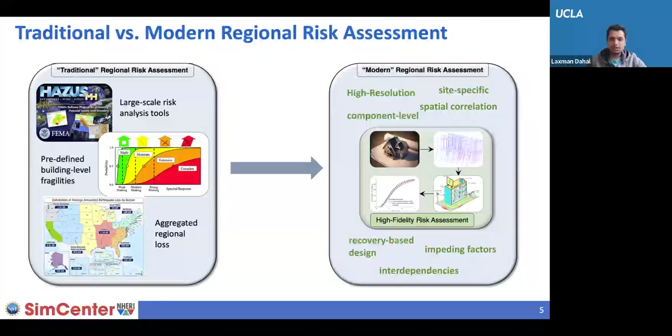So what is a high fidelity, high resolution risk assessment framework? Before getting to that, I want to first establish the definition of some terms that I've been using and will be using for the rest of the presentation. So by resolution, I'm referring to the level of detail and accuracy in a map. So from the regional assessment framework perspective, the highest resolution that you can have is site-specific analysis. So that's per building across a region, and you could aggregate across neighborhood and zip code. And as you zoom out further, you lose the level of resolution.

And by fidelity, I'm referring to the level of detail in structural modeling. So in this case, I'm loosely referring to the dimensions as the level of fidelity, but obviously it would include the detail of the material parameters that goes into the numerical model as well. So fidelity refers to the detail in the structural numerical model, roughly.

And the other term that I'll be using is FMA. So that refers to fully mechanistic assessment. So that assessment follows the FEMA P-58 methodology. So it goes through hazard simulation, creates a structural model, and performs everything explicitly, defining even the components per building and per floor level. So yeah, those three terms are the terms to keep in mind.

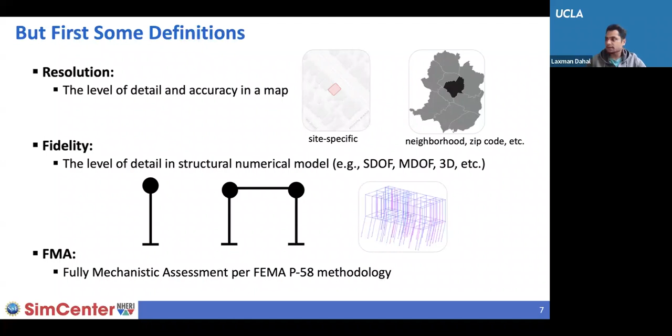So the proposed framework has six different steps. So the first and trivial step is to identify the region and building inventory, right? So once you have the building inventory and the region, then we would want to model the exposure and model the seismic hazard. So these two steps do not necessarily need to be in sequence, since these two steps are independent, so they can be performed in any order, as long as you model the exposure, right?

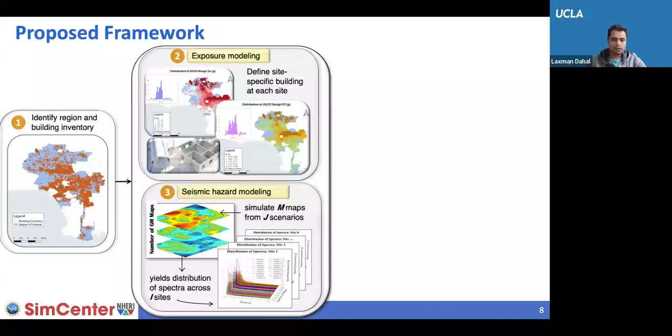So you model what buildings you have at each site, and you model what is the anticipated shaking intensity that you're expected to see at that particular site. So once you have the building and exposure modeled, then we apply some kind of filter. And the goal of this filter is to identify similarities between sites, right?

So for instance, across a region, there could be two sites that have a similar building and that are expected to see similar shaking intensity. So instead of performing explicit FEMA P-58 type of analysis for two different instances, we would only perform analysis for one and use the information from that to represent the losses at the other one. So that way we reduce the number of explicit analyses that we perform while still maintaining the high level of fidelity and resolution.

And so once we identify the number of unique runs that we have to perform across a region, right, then we implement Auto-WoodSDA, which is an end-to-end automation tool that I'll talk about in the next slide, and use that along with distributed computing to scale that computation for thousands of buildings, right? And the output of that process would be the site-specific distribution of losses across however many sites that you have within the region.

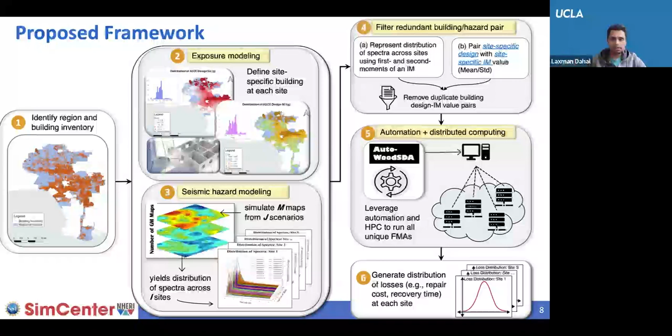So this is the overview of the end-to-end automation tool, Auto-WoodSDA, or WoodSDA in short. So one end of the computation is inputs, right? The set of user inputs, which includes site-specific information such as latitudes and longitudes, building-specific information such as footprints, the material type, layout of the shear wall, as well as the ground motion sets that you would use to run the dynamic analysis.

And the other end of the workflow is the output, which can be any loss parameter that you would want. For instance, collapse fragility, the loss curve, distribution of functional recovery time, and so forth. So there are 4 steps in the end-to-end workflow.

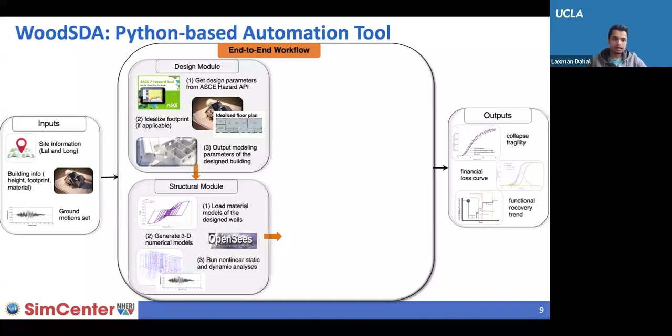The first one is to take the building information and site-specific information and create a code-compliant design. And using that design, we create a 3D OpenSees model. We import the ground motion sets and run the dynamic analysis, perform building level damage assessments, and then use the automation tool to populate the components into the building, and use Pelicun to perform economic assessment, and also the ATC 138 functional recovery methodology to perform the functional recovery analysis.

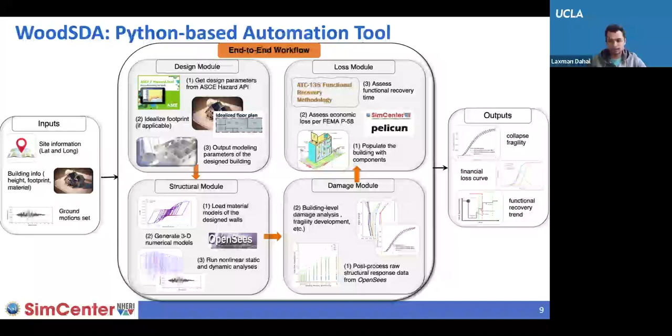So you might have noticed that the four modules follow the FEMA P-58 methodology as shown on this slide, right? So for instance, the structural analysis closely mimics the structural module that I presented on the previous slide.

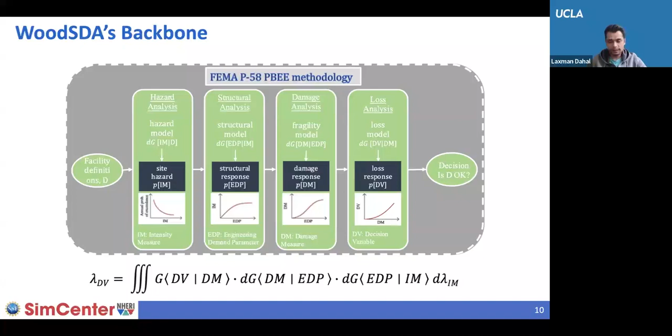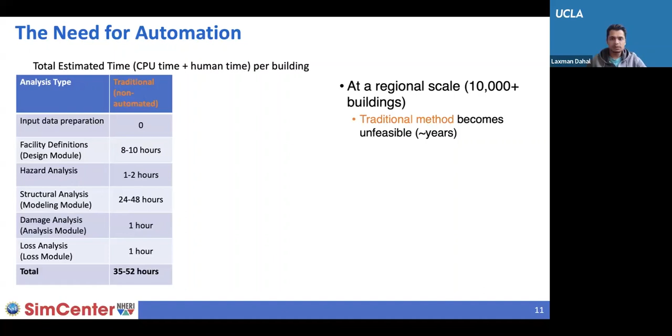And if we wanted to scale that for a region with tens of thousands of buildings, that method would be unfeasible, right? So we basically wouldn't be able to perform regional scale assessment. With WoodSDA as a standalone tool, we would reduce the computational time significantly, but not enough to make the computation feasible without supercomputers, right? And one of the most time-consuming parts of WoodSDA as of this point is input data preparation.

So, since we design code compliant design within WoodSDA, it requires explicit configurations of shear walls to be defined so that it can design those shear walls, and that takes about 3 to 6 hours. But in this study, what we did is we predefined a database of design variants that I'll talk about in the next slide, so that we don't have to spend that time preparing the data.

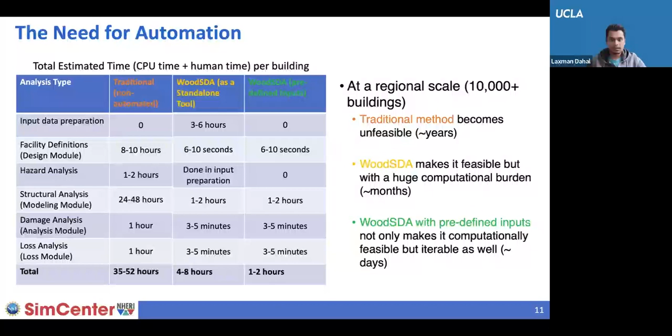And with the predefined database, the WoodSDA is not only computationally feasible, but also iterable if we wanted to do sensitivity studies for recovery-based design. So I won't go into detail on what went into the development of this design variant database, but we created a database of archetype buildings, but these buildings only have the shear wall locations and length defined, but they have not been designed yet, right?

So we included 4 different parameters: number of stories, different floor layouts, seismic weight, and all of these layouts have been well studied in the published research, such as the FEMA P-2139 study, which was the product of the ATC 116 project.

Right, so once we have the automation tool figured out, then we move on to the distributed computing. We use HPC cluster in 2 major ways. The first one is to implement the WoodSDA in a distributed computing setting. Each computation of WoodSDA for one particular building is independent of one another. So even though the assets are distributed spatially, the computation itself is independent. So there is no input or output data flow between different processes, which allows us to exploit the distributed computing framework and not be constrained by any computation limitations.

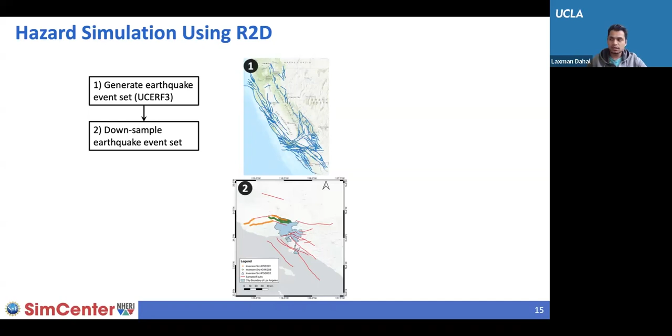So using that, we downsample the earthquakes into a manageable set. In this case, we downsampled 300,000 to about 20 scenarios using the OPS method, which I'll briefly touch upon in the next slide. And then for each scenario, we simulate correlated ground motion maps. And then we downsample the total ground motion maps to, again, a manageable size. And all of these processes are done using R2D backend code.

And finally, the fifth step is to select the ground motion records, since we're using Auto WoodSDA to perform explicit analysis per site. So we need to select ground motions per site. And even though R2D has a built-in ground motion selection tool, we developed our own in-house to incorporate some of the previous research that we have done on this topic.

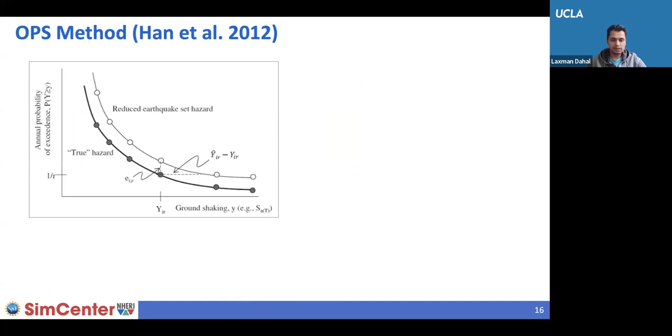So to give a brief overview of the OPS method: the objective of the OPS method is to match the true hazard, that's the hazard that we get from the USGS hazard API, with the hazard that we recreated from the downsampled set of earthquake events. To do that, it has 5 steps, and it utilizes a mixed integer optimization routine, where it loops over all the sites and all the return periods that you specify, and minimizes the error as it downsamples the population set to the reduced set of earthquake events.

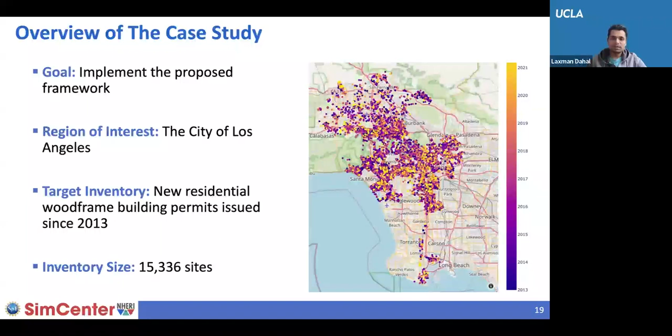So we implemented the high fidelity, high resolution framework for our case study, looking into about 15,300 new single and multifamily residential buildings. These buildings were permitted to be built since 2013, and that data is publicly available in the LA Open database. The figure on the right shows, along with the timestamp, the buildings that were permitted over the years.

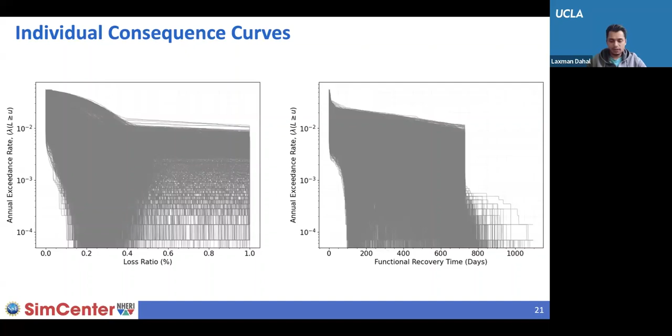I won't dig into the detail of the results, but these 2 plots show the loss curves. The figure on the left shows the loss curve of the loss ratio of 15,000 buildings, and the figure on the right shows the loss curve for the functional recovery time in days for all the 15,000 buildings. One of the things we can do from those loss curves is take a stripe out at a certain return period level.

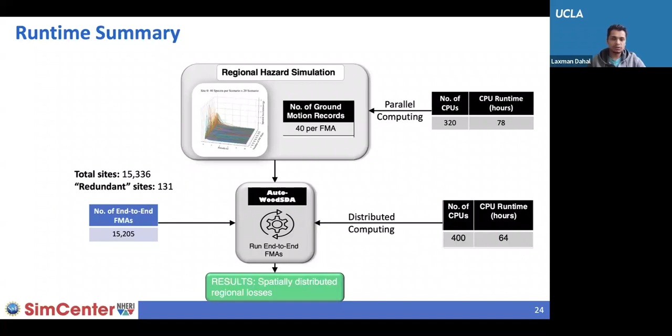As I noted earlier, one of the steps was to identify the redundant sites. We had 15,336 sites, and out of that, 131 are redundant. The reduction seems a little low considering the total sites, but since our goal was to maintain high fidelity and a high level of resolution, the reduction is lower. In the next few slides, I'll talk about how we can play around with different approaches to reduce the number of runs we have to perform.

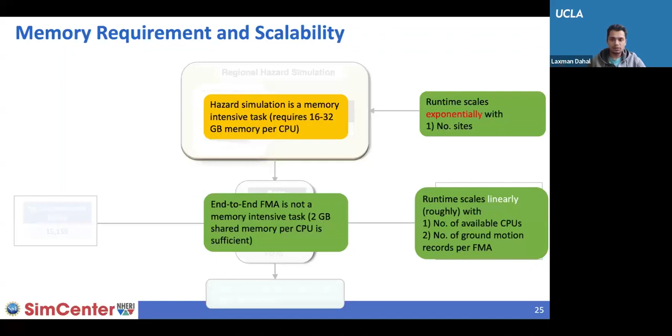In terms of the computational aspects of running these large-scale simulations, hazard simulation is a memory-intensive task. For 15,000 sites, you have a 15,000 by 15,000 matrix, and you have to include the correlations in shaking intensity across the sites. So the computations increase exponentially as you increase the number of sites. That's not the case in the end-to-end fully mechanistic assessment using WoodSDA because the computations are independent. The runtime scales roughly linearly as we increase the number of sites, the number of CPUs, and the number of ground motion records per building.

Running large-scale simulations like this came with many challenges. One of the biggest was the convergence issue in the OPS method. As I mentioned, the OPS method loops over all the sites to minimize the error, and with 15,000 sites, it didn't converge for us. So instead we grouped those 15,000 sites into 108 k-means clusters, and used the centroid locations of those clusters as a representation to reduce the number of maps as well as the number of earthquake scenarios in the OPS-based method.

The other solution we implemented was lifting the runtime cap. Some of the SimCenter tools have a runtime cap built in to limit resources to 60 minutes. So we lifted that and let it run until it converged.

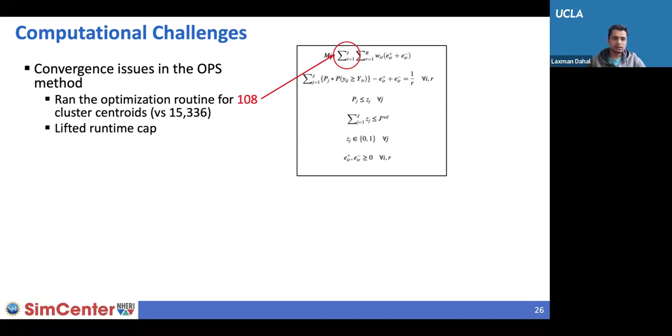Another issue that we faced was the timeout issue in the USGS hazard API, right? So reducing the number of sites to 108 kind of solved that. And we also increased the buffer time on the API so that it doesn't time out while we're running the analysis.

And the third one was probably the biggest one to figure out and solve: the parallel computing input-output bottleneck, right? So R2D uses OpenMPI to parallelize the computations, which is pretty efficient for small scale analysis, but for large scale analysis like 15,000 sites, whenever you put computations into the compute cores, each compute core performs Monte Carlo simulation to generate the map.

So when you transfer those huge data files between the compute node and the root node, the memory allocations within the root node were not able to handle the data that was being transferred back. So we discretized the execution into 4 different batches with 5 scenarios per batch. That's how we were able to run all 20 scenarios and get the stochastic set of maps.

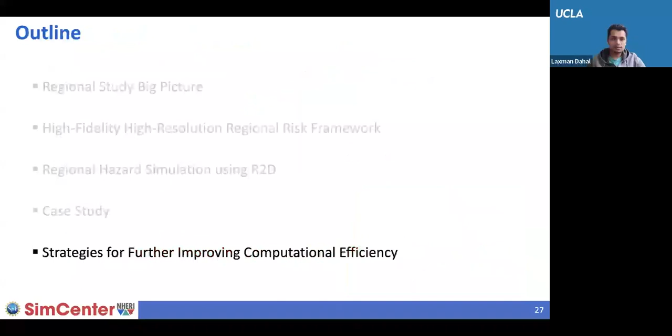So how can we increase the computation, right? We view regional scale assessment as a trade-off between fidelity, resolution, and efficiency. We roughly break it down by resolution and fidelity as I prefaced earlier. For resolution, you can perform a very high level of resolution, so we can define the building at a very high level, and the same for hazard. That would give us the high level of resolution that I presented in this study.

But if you wanted to trade off some of the resolution, for example define the buildings at a bin or a cluster level, you would end up with about 6,600 buildings, right? So that's 1/3 of the total inventory that you started with. If you wanted to reduce the resolution even further to clusters instead of bins, or change the number of clusters, then you'd get about 1,700 fully mechanistic runs that you have to deal with.

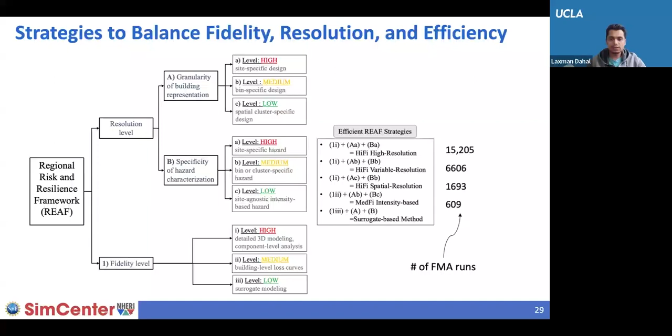So by playing around with different levels of fidelity and resolution, you could control the level of efficiency, and obviously that would be reflected in the robustness of the data that you'll get. But this will indeed give you the efficiency that you're looking for.

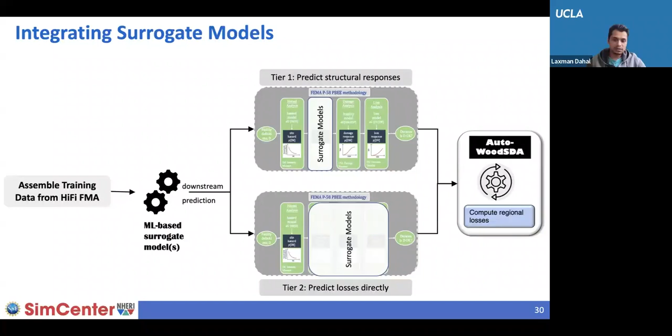Another approach that we're exploring within our research group is leveraging the power of surrogate modeling. We have all of this rich data from high fidelity assessments, so we can use that to develop surrogate-based models, and then use those to replace the computationally expensive part of the FEMA P-58 methodology, which is the structural analysis part, and then perform the downstream loss analysis to get the regional loss. This is another part of the work currently underway in our research group.

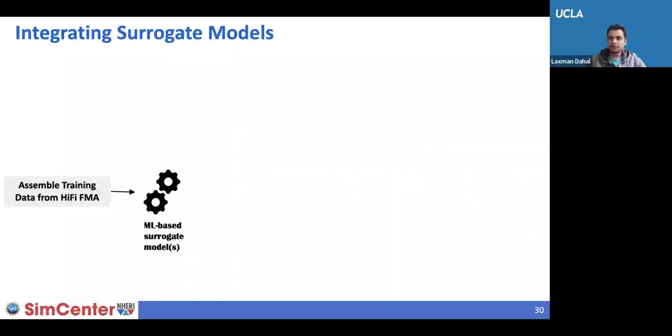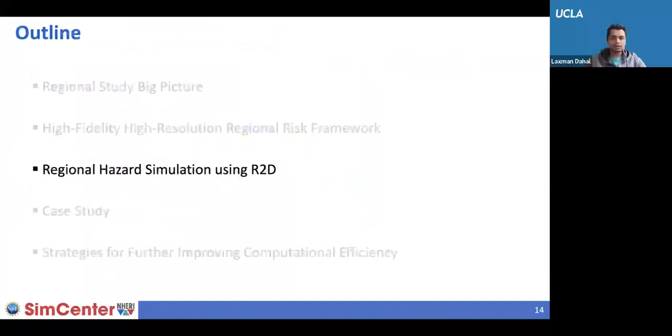You studied wood frame construction from 2013 and on. How applicable is wood SDA to older construction? Yeah, that's a good question. When we developed the design variant database, we included some of the existing materials that you might see in existing buildings. So even though the building designs are code compliant per the 2016 ASCE code, it would still be applicable to some of the existing construction as well.

Okay. And is wood SDA available to others?

It's currently under review, so once that process is done, it'll be publicly available.

All right. You mentioned that the R2D tool has a ground motion selection capability, but you chose not to use it. Can you explain why? Yeah, so in our previous study, we found that ASI was the optimal IM for some of the buildings that we're looking at, specifically wood frame buildings. So we wanted to incorporate that into the ground motion selection process instead of SaT1, which is typically what R2D does. So yeah, that was the major reason that we decided to kind of develop our own.

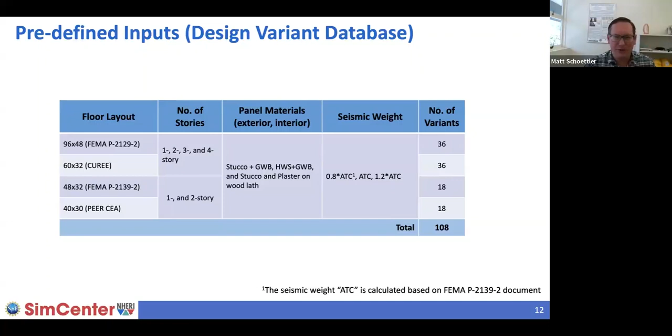Okay. And then going back to your computational challenges near the end, you said you discovered this input-output, the I/O bottleneck. How did you discover that? How did it become obvious that there was a problem? It was kind of trial and error, so we thought it would run. So we let the whole set run for about, I would say, 5 days, and it just didn't finish running. And since the data was jammed, we weren't getting any errors because there wasn't any computational error, so to speak.

So we kind of did trial and error. We reduced the number of sites. We did 10,000 sites, still errored. We did 5,000 sites, it ran. So we thought maybe the data input output is the problem because computationally there is no error. That's why I said it was the hardest one to figure out, because we didn't quite know what was the issue that was leading us to not get the result, but the code itself was fine.

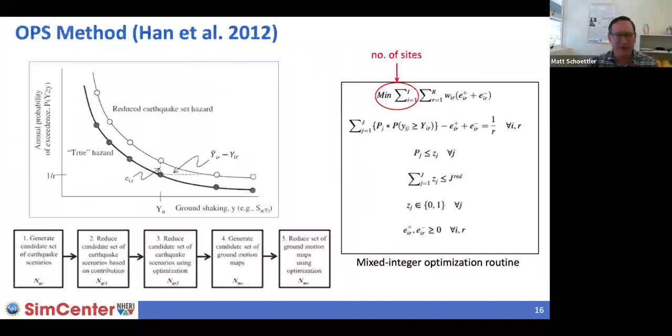And then if we go back to the downsampling of your hazard maps, the question is about how you went about selecting 60 as your target number for your downsampled set. How did you know that was a good number, or how did you arrive at it? Yeah, that's a good question. One of the constraints was we wanted to limit the number of ground motions, because that would increase the computational time, since we're running OpenSees analysis with those ground motions. So we started with 40 and did a sensitivity study: 40, 50, 60, 90, 100.

So we basically compared the KL divergence between the population set, which is the 800 maps, against the set of downsampled maps, and 60 seemed to be the sweet spot. It had low enough KL divergence against the full set, but it didn't impose that much computational burden on WoodSDA. So that's how we got to 60.